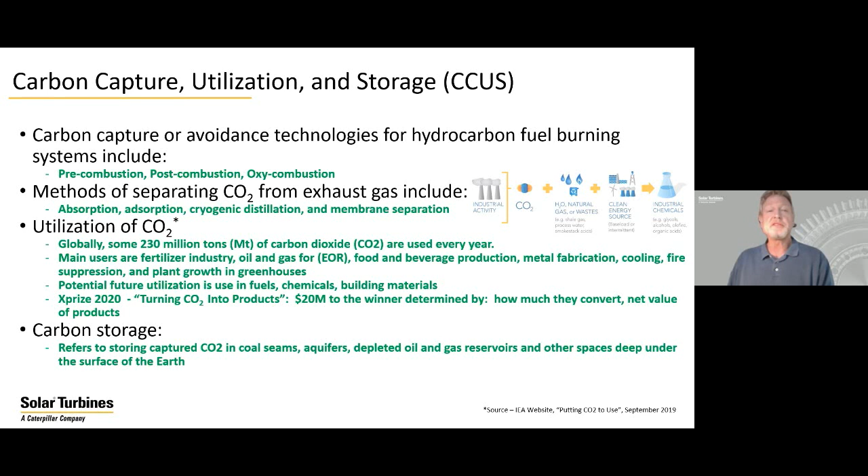The last one is carbon storage. Now this to me is not the ideal situation since you're not leveraging it as a product and getting some money out of it. But this refers to storing CO2 into coal seams, aquifers, depleted oil and gas reservoirs, and other spaces deep under the surface of the earth. So what kind of applications apply to Solar Turbines engines? Well, first of all, you can have creation of biofuels with the captured CO2 in our exhaust.

One example is the Phytonix process. And again, taking exhaust gas emissions, then putting them in this process, these reactors in the back end. It's a modified photosynthesis process, and in their particular bent on this, they create butanol.

Recently, we submitted a proposal with San Diego State, a local university here, and T2 Energy. We didn't win this proposal, but in the proposal, we were looking at what we call better than net zero carbon emissions, since we're also taking carbon dioxide out of the air. But in that effect, we could capture it.

It comes out the exhaust of the back of the engine, and the bioreactors can catch the CO2 and convert it to B100 algal biodiesel. The residual product can be used for feedstock and biomethane. A dual fuel gas turbine could run on this stored B100 fuel. So you could run on natural gas part-time and the stored B100.

And incidentally, the professor I was working with told me that with the carbon captured, theoretically, if you were to capture all the carbon and produce the biofuel, that would produce about half the needs for the fuel if that was run successfully with the bioreactors.

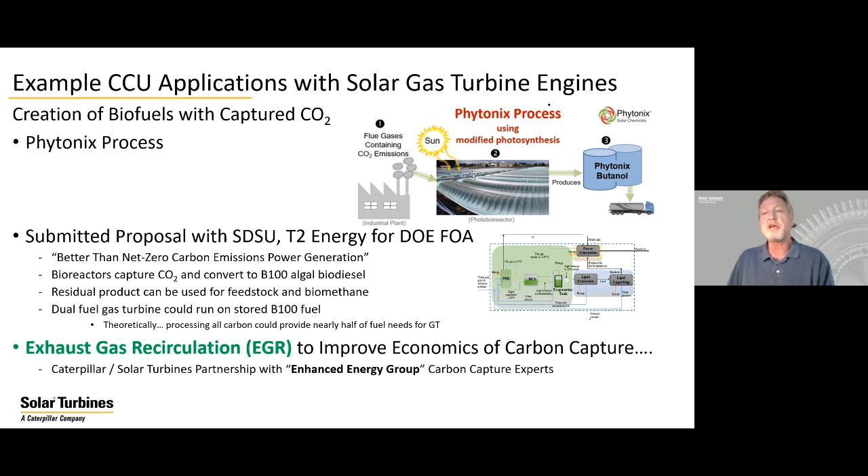So what I want to talk to you about now is exhaust gas recirculation. This is to improve the economics of carbon capture. Caterpillar and Solar has a partnership with this outside group that we got to know last year, Enhanced Energy Group, and they're carbon capture experts that came to us to talk about this. This really intrigued us.

And this is what we call a semi-closed system. Basically the intent is to increase the CO2 concentration in the exhaust and minimize the amount of exhaust, so it makes it easier and more economical to capture the carbon dioxide.

So myself, along with a gentleman within Solar, Priyank, and another gentleman, Paul Dunn from Enhanced Energy Group, we published a paper for this year's ASME where we looked at pretty detailed simulation of the exhaust gas recirculation. And coincidentally, we also submitted a proposal with the DOE, which we're a finalist for, to study it even further.

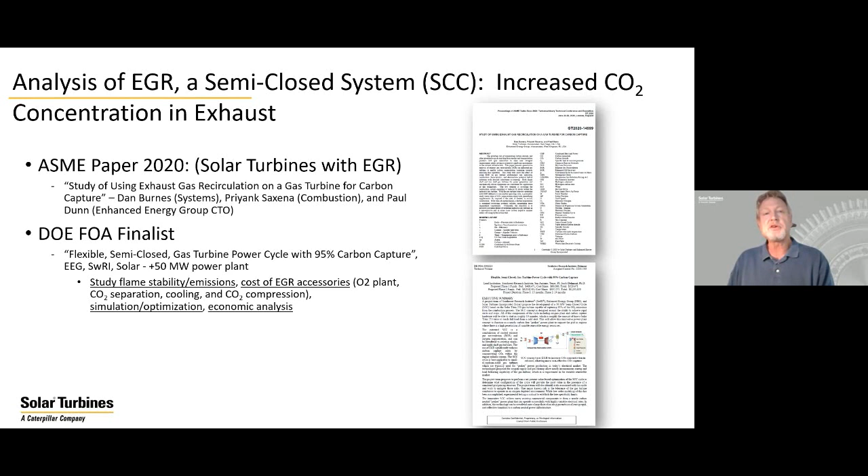And some of the things that we're looking at, this is for a plus 50 megawatt type power plant. So it would take 3 of our Titan 250s, but we'll study flame stability, emissions, the cost associated with it, simulation optimization, and economic analysis. The last thing, we are looking at a potential demo project with one of our oil and gas customers, and that's pending currently.

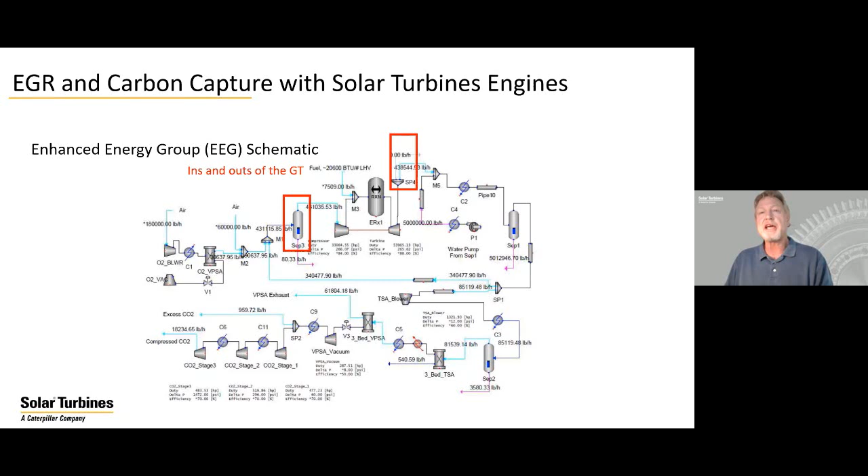So here's a schematic from the Enhanced Energy Group. And when I was first presented it, the first thing I had to do is figure out, all right, where's the gas turbine in here, and where's the ins and outs? So here's the ins and outs of the gas turbine in this relatively complicated schematic.

And the other parts I had to consider when I modeled this simulation are all these bits and pieces and claptrap in here, pumps, coolers, mixers, splitters, and so forth. And so now I built a simulation model around all the pieces that I needed to be able to understand the behavior of the gas turbine. So I modeled both a Titan 130 cold end drive and a Titan 250 hot end drive to understand the effects on both of those engines.

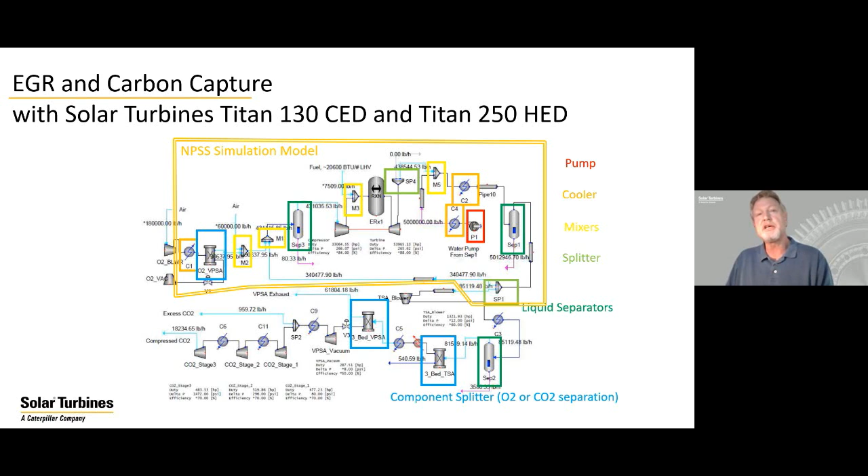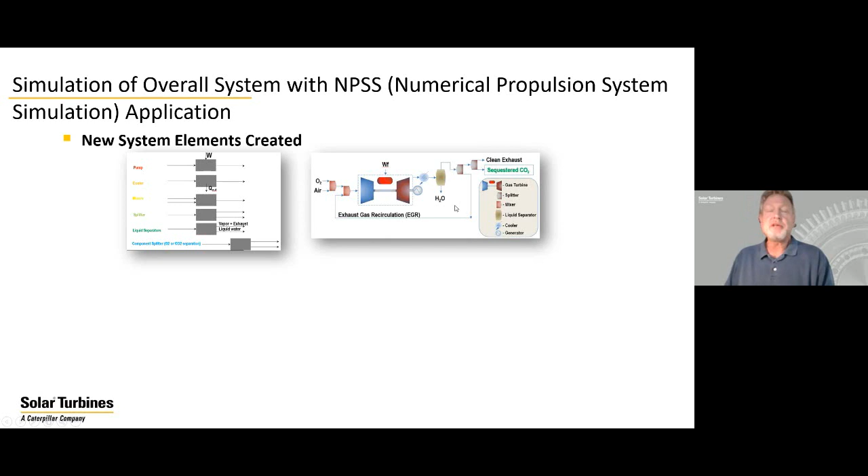So as I said, we had to create special elements that represented all those different pieces that you see in there. And this is a more simplified schematic, where you see that air and some supplemental oxygen is needed to do this exhaust gas recirculation. It enters the engine, it goes through, we cool the exhaust, we condense a lot of the water out, and then we recirculate most of the exhaust gas back into the inlet. And then clean exhaust goes out, and we attempt to sequester all the CO2 in the back end of the engine.

So all these, as I said, new elements were created, and also very detailed accounting. I have detailed accounting of over 800 parameters I'm looking at in this analysis, thermal analysis, and the constituent, non-dimensional behavior is all accounted for, looking at different EGR levels, or exhaust gas recirculation levels, and how much oxygen I need to supplement.

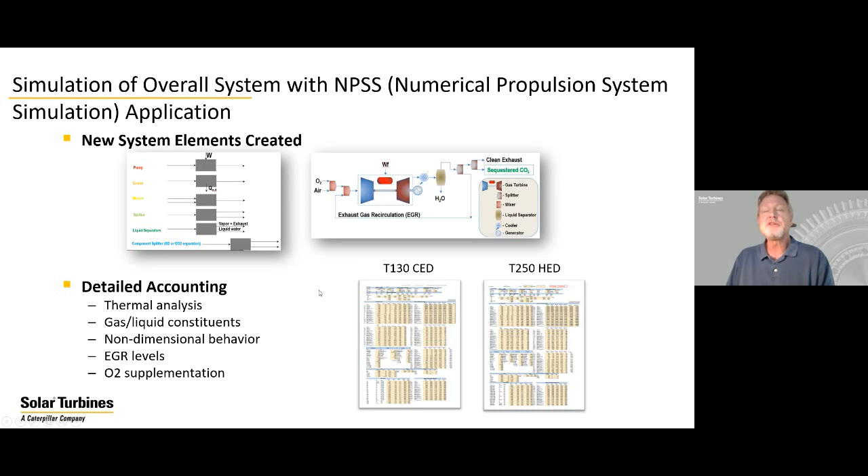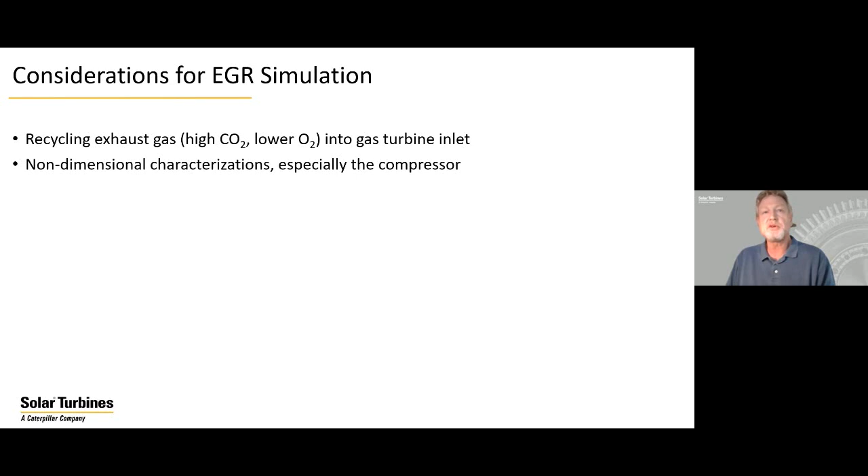So the considerations in there are to get a high CO2 out the back end and also watch the lower O2, since you deplete the oxygen as part of the products of combustion. So we watch both of those things, watch the non-dimensional behavior, especially the compressor, and the overall optimization.

So I want to minimize the amount of oxygen I need. I want to maximize the CO2 in the exhaust. Typically, gas turbines have about 3% molar fraction of CO2 that comes out the back. With EGR, we'd like to push it towards 20% or so molar fraction. That really helps the economics.

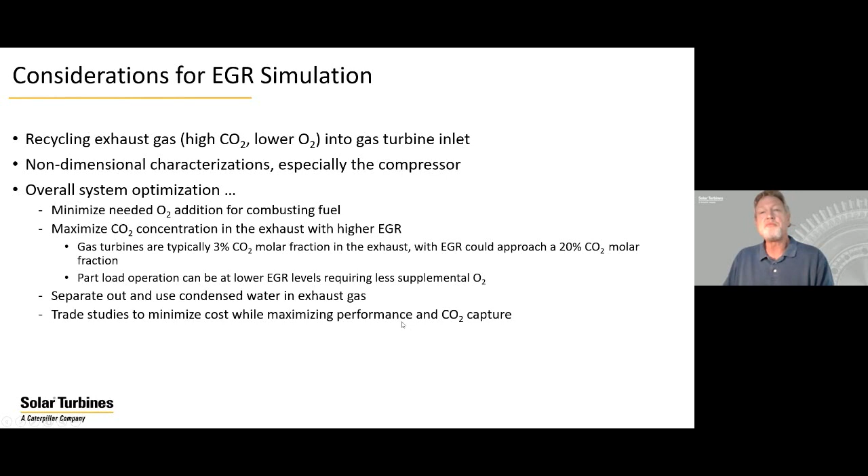And part load operation can be lower, once you size the equipment for the full load application. And in trade studies, you want to minimize costs while maximizing performance and also the CO2 capture. So here's some of the results that I learned from doing this simulation. Power improves with EGR. That's one of the interesting things.

Carbon dioxide is the densest molecule that's involved in the process. So using CO2 as a working fluid increases the amount of mass flow through the engine, since it's more dense, and the gas turbine is a volumetric displacement machine. The efficiency is about the same or less, and the hot end drive improves a little bit more than the cold end drive. But you can see on this particular plot, this y-axis represents thermal efficiency, the x-axis represents power.

The blue is the hot end drive characteristic. So here's where we start from here. With a normal operation engine, this is 50% exhaust gas, 60, 70, 80, et cetera. And you can see how I'm increasing power substantially as I add more exhaust gas recirculation.

And looking at it from a basis of power and thermal efficiency, this is showing from 59 degrees to 120 degrees, so off ambient type of performance. This is the nominal curve here, and then this is with 75% exhaust gas recirculation. This particular parametric is the same that is shown here. But you can see from 59 degrees, we lose a little efficiency, but we always gain power in every case. This is a similar plot for the cold end drive.

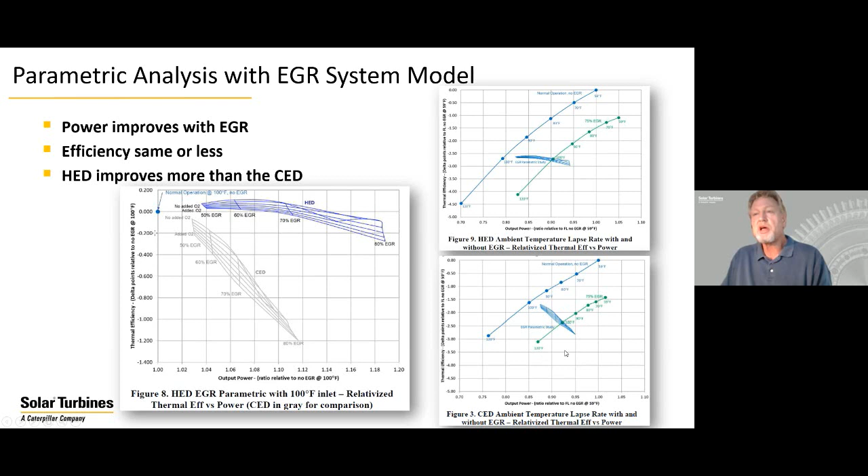So continuing on, as I said, the other thing is to minimize the required O2 levels determined by combustion analysis. So in our combustion analysis, we did detailed accounting to understand how much oxygen we want. We want to minimize the amount of added oxygen there. And we found out we can run with depleted oxygen a fair amount. And this red zone is the area that combustion told me that I could run as far as the mole fraction of O2 into the burner. So this basically tells us how we can minimize the amount of supplemental oxygen that we need to put in the inlet.

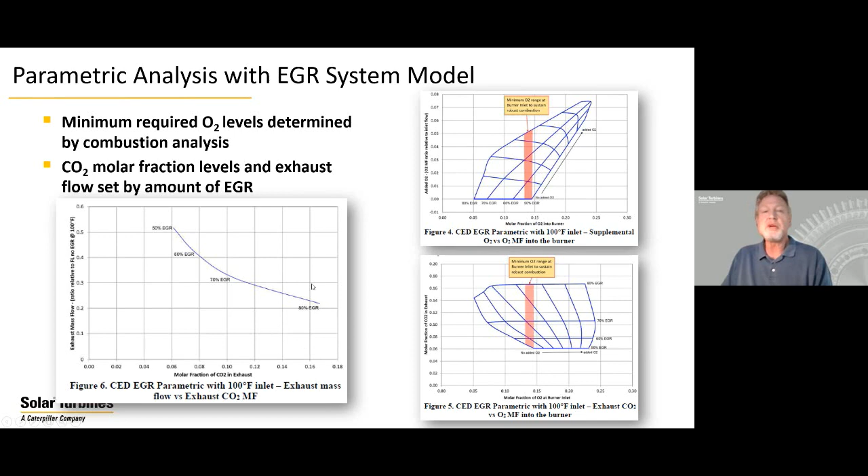The other interesting thing is, again, as you increase the amount of exhaust gas recirculation, the exhaust flow decreases in proportionality. So, for instance, at 80% exhaust gas recirculation, you only have about 20% of the flow to deal with. So that's what helps size your carbon capture equipment, and it helps with the cost of that.

So here I'm going to talk a little bit about carbon capture equipment, and this was provided by the Enhanced Energy Group. Traditionally, carbon capture has been with the amine process, and CO2 is absorbed into liquid, creating a salt, then heated to drive off the CO2. This is typically a high capital cost of equipment and a disadvantage with Solar engines. It's better with much bigger systems.

EEG's efforts have been predominantly in the mole sieve based capture. That is an adsorption process. It's smaller and less expensive than the amine process, and it's better with smaller systems. And as I was saying, the absorber size cost scales with the inverse square root of the purity based on the constant velocity and dwell time.

So you can see from this plot on the right here, as you increase the mole percentage of CO2, you substantially decrease the cost and size of the equipment. So that's part of the reason why we're doing this exhaust gas recirculation. Again, ideally we'd like to capture... is linear as we increase that concentration. So 7x, if you could do that much, that would bring you up to about 21% CO2 rather than the normal 3% molar fraction of CO2 in the exhaust.

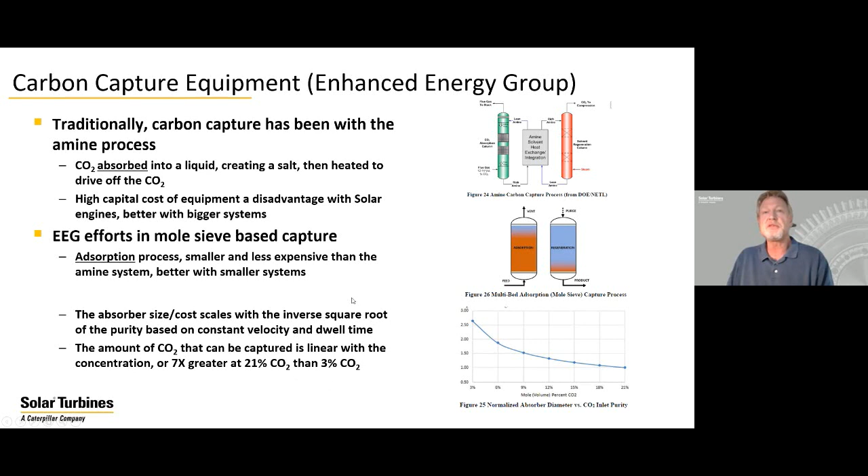So again, the one thing I just wanted to really highlight is that at Solar Turbines and engineering, we are taking it very seriously as far as considering ideas of how we can capture carbon or any other ways that we can mitigate the higher cost of CO2, both to the environment and to our customers.